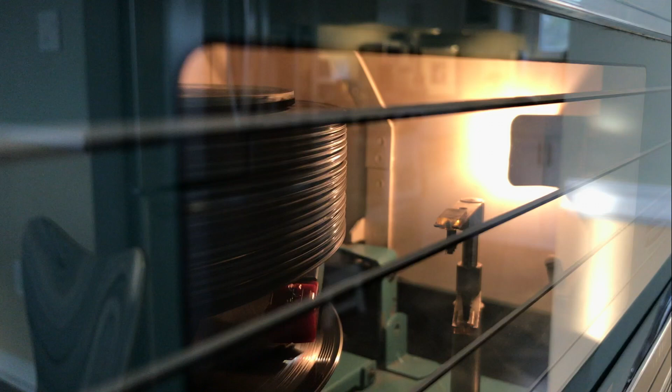In this video, I'm going to tell you how to repair your broken Seeburg 1000 motor coupling. If you've got a Seeburg 1000, you know what I'm talking about. This is the Achilles heel of this machine. I'll show you where it is.

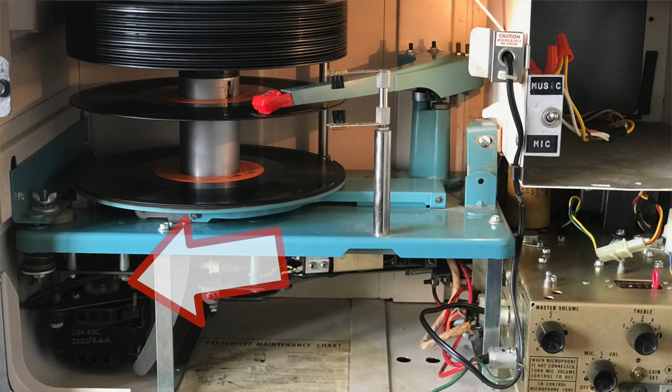This is actually the motor assembly, and this is the way you'll see it if you look inside your machine. And this is the piece. It's a little rubber thing that goes between the capstan up top and the motor at the bottom. They made these out of a kind of rubber that would perish over time. And so here's one. Actually, this whole thing I made fresh a couple years ago in the machine shop.

We're not doing that today. What I'm going to do is show you how to fix your existing one. But this is what it's supposed to look like. A capstan will be vertical like that with a flexible rubber coupling that goes like so, and then a small ring that goes on the end of the motor. Now here's the motor. This would connect like that.

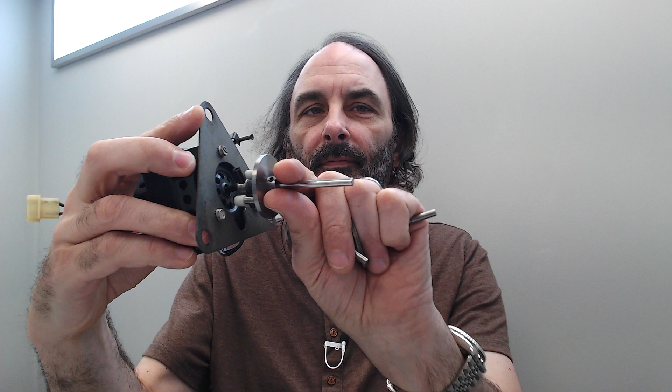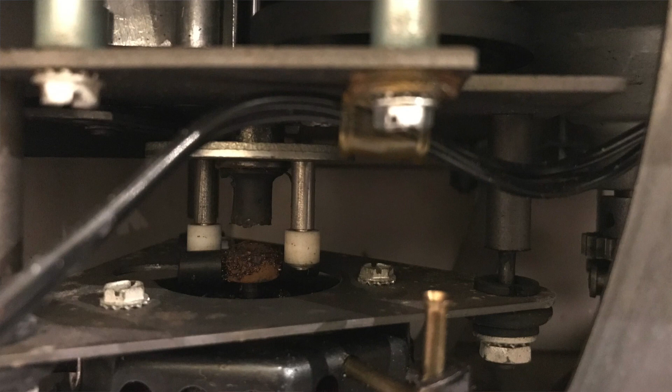And this is what most people's look like. They're broken. And here's an image of one in a machine that's broken. That's what you'll see. And if somebody's selling one on eBay, you might want to ask them to see a picture of the capstan so you can see if it's broken or not.

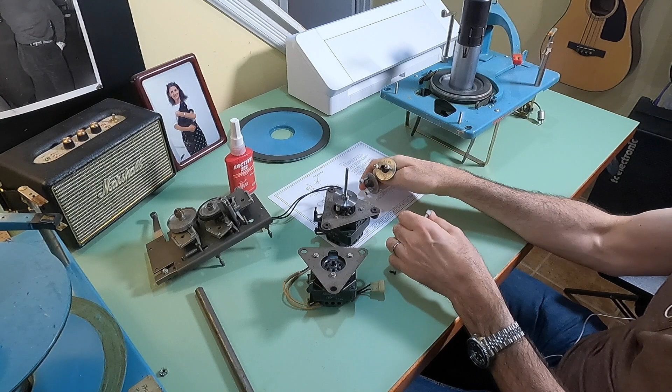Let's get to it. And you might not notice that you've got a broken coupling because of the way they designed this. If you look at it, you can see that there's these two little plastic outrigger things that sit in alignment with these little wings on the hub at the top of the motor. And so if this coupling breaks, these little wings smack against these two little outriggers, and those will turn your capstan. Let me show you how this looks.

So if you look in the front of your machine and you see that this rubber is broken, then you have to fix that. This is just going to make a clattering noise, and your playback is going to be all full of wobbly stuff until you fix this. So the way we're going to go about this is we're going to take off the broken old stump of rubber, and we're going to drill a little bit of a hole in here.

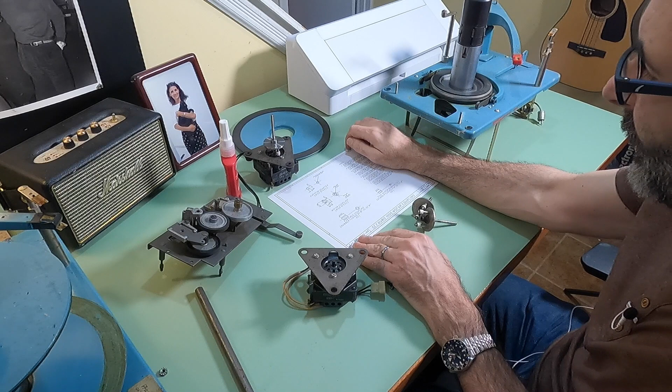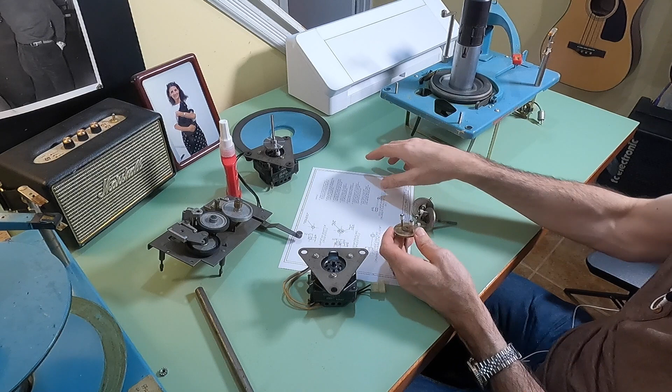We're going to make some pieces in the machine shop, and we're drawing here. We're going to make a small ring that's going to go in the base here. Going to hold it on with this screw. Then we're going to make the coupling that goes on the motor. That's this little thing with the wings on it down here. We're just going to make that out of this piece of steel.

And finally, we're going to glue in a piece of rubber tubing to form this coupling here, this flexible coupling. And by the time we're done, we'll have a new coupling for your motor.

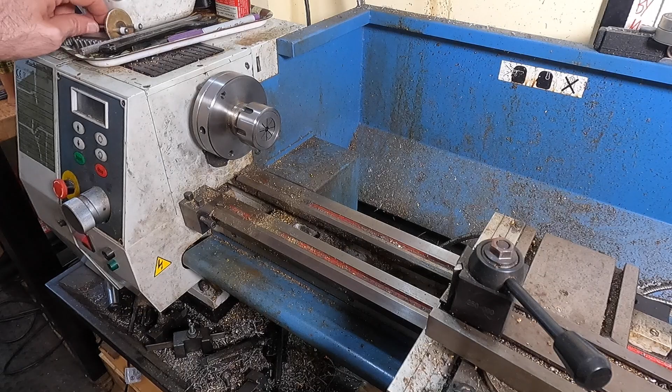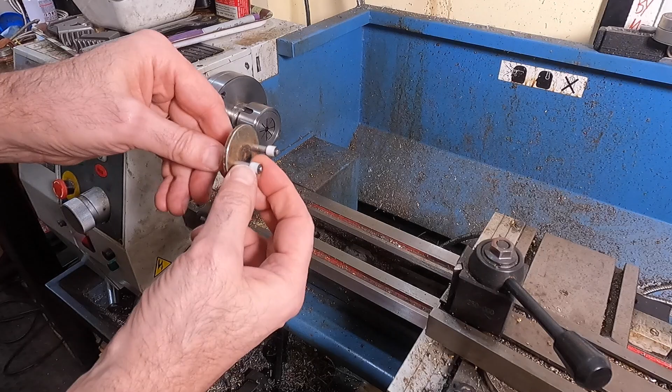So the first thing the drawing calls for is to make a small 1/4 inch cut inside this, right in the bottom of that. It's going to be a little bit tricky because I don't have a cutter that's going to easily clear these little wings, but we can't take them off because they're sort of stamped in position here. So let me get a collet.

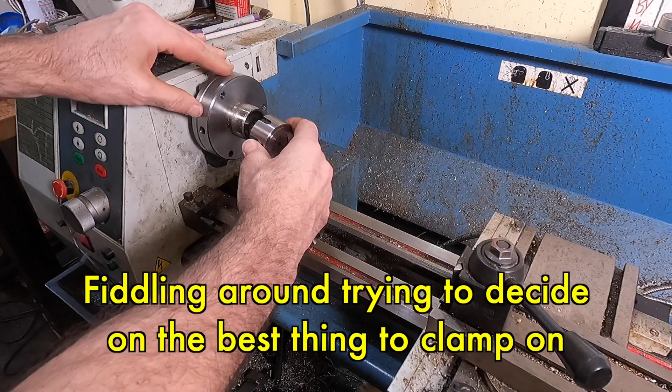Oops. Yeah, this will fit much better. Pop that out. Pop the new one in. See how that works. Wasn't planning on doing all this, but it seems like it might be necessary.

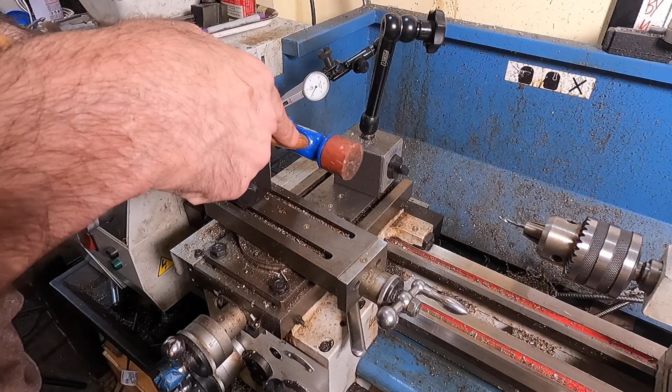All right, let's just see if we can get this thing to be kind of... So that's low, that's high. We shall... All right, that's good. Hopefully that'll help.

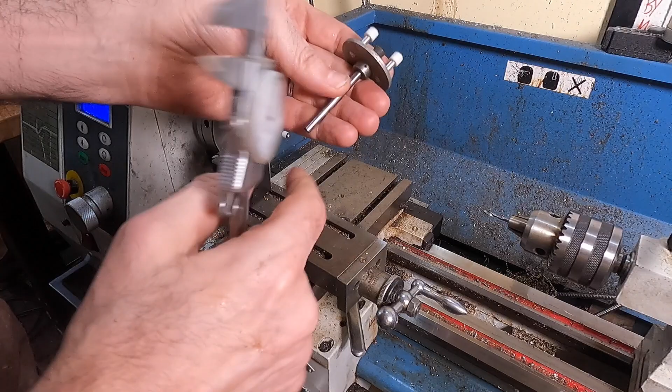And see just how deep the screw would be on one of these things. Got this pin, and we don't want to go into the pin. That's hardened steel. We don't want to do that. So it looks like, I'm just eyeballing it here, we've got 1/4 of an inch. That's all we got. 6-32 will be a number 36 drill bit.

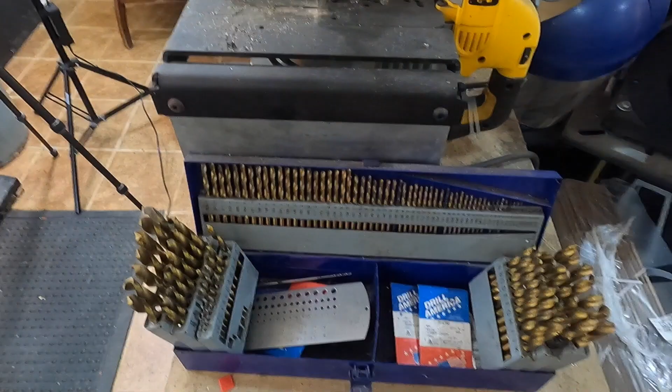A little piece of paper behind here, and I'm going to sight on that drill bit. Make sure the tip of it, because we don't want to go into the roll pin. So there we are, we're right at the edge. Zero this out so that as I crank in, I'm going to make sure I don't go past 250. And we'll just go maybe

Makes me wonder if that capstan's hardened or not. I guess not. Okay, we're at 200 thousandths. That's scary. There's little wings going over that. I'm not used to that. It's a little sketchy. Just try to brush a little coolant on there. It's going to cause a problem. So we're at 200 thousandths. I'm waiting any second to actually hear that roll pin.

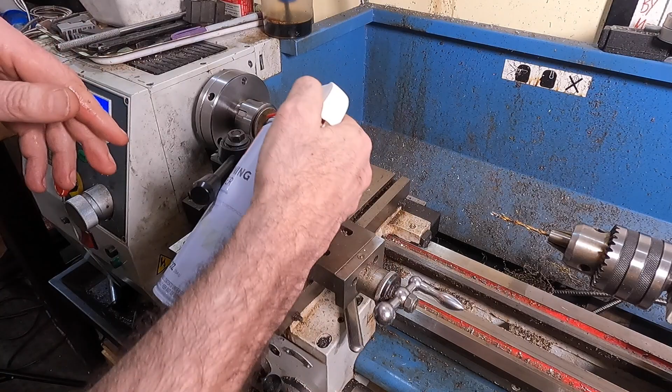240. That's good enough. Okay. I'm actually just going to use a drill bit, 1/4 inch drill bit. And that's a 1/4 inch. All we really need is for the little sleeve we're going to make to go in there and locate itself on the edge. So that'll work. If I had a boring bar that would fit in there... I don't have a little tiny boring bar like that.

I gotta put the oil on ahead of time because of these dumb wings. So I need to go 0.0625. There it is. Pick it out. And again, all that's there for is just to locate the thing that we're going to slip in there so that we can latch it down firmly with the screw.

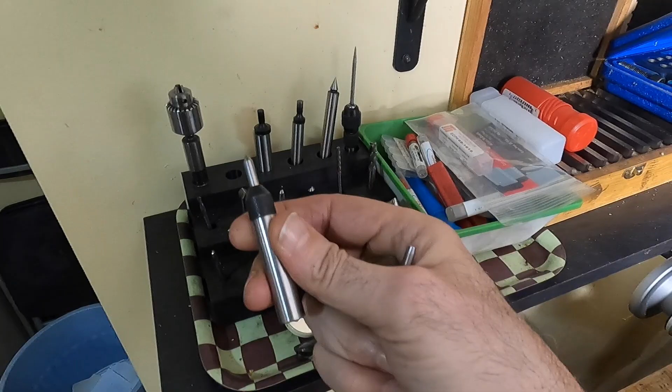Now, that looks like the one, 632, and grab this little thing here. It's going to go into the end of the tap wrench and guide it for us. A little springy thing that goes into the end of the tap wrench like that, and it'll keep me from going astray. Okay, I'm going to start with the taper tap right there.

We're not going to get many threads in this. Tap Magic. Can't even get the taper tap to start because we didn't go that deep. It's going to be a bottoming tap all the way. We hit bottom right there. There's only like 5 threads in this thing. That's all we need.

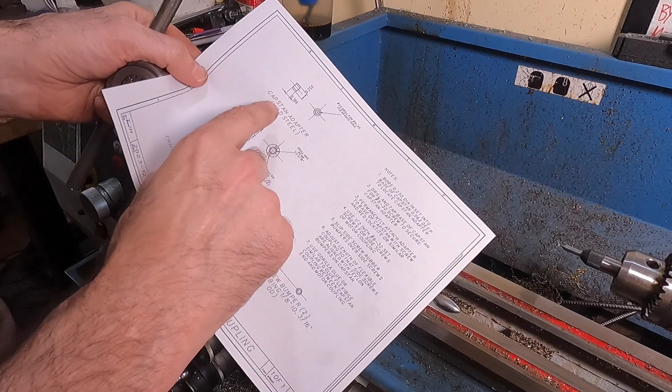Let's see if our screw will start. There it is. That's nice. That'll hold our little adapter sleeve very well. All right, now we're going to make this piece right here, capstan adapter. It's going to be 1/4 of an inch wide, and this is 3/16 of an inch long, and there's going to be a hole drilled through it for the screw to go through.

So I'm just going to use this piece of steel. It's mild steel, and it fits right in the 1/2 inch collet that we were using before. Leave that sticking out a little bit like that. Right. So everything's good.

Now this is going to be 3/16 long, so I'll just go in. I've taken my facing cut. I have not moved the position of the carriage. I'm going to go up here and zero everything out. Okay, I'm just going to go in. Just going to touch off. And I'm just going to go in until the number says, let's go.

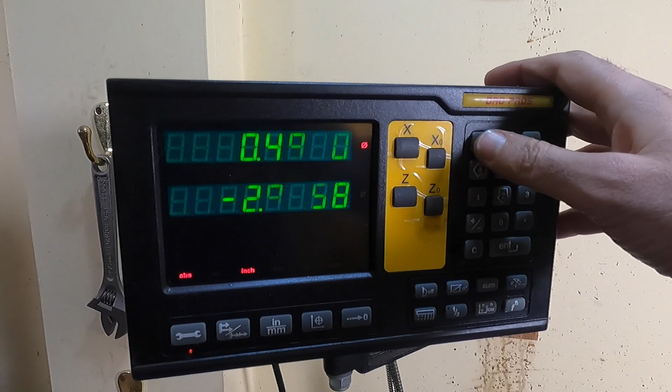We'll go in a 1/2 inch, maybe not a half inch, it's a little bit much. 3/8. There we go. I have not touched the cross slide. And go in here and measure what this says. It's telling me 494 thousandths. So we go X. Enter. So now what that says is that the little circle with a slash means diameter. So that means 494 thousandths is the diameter of the part.

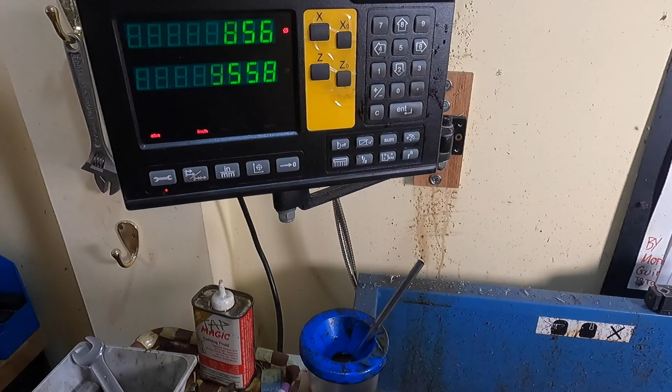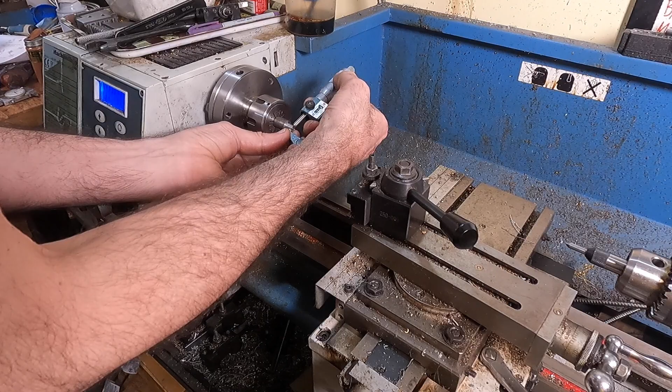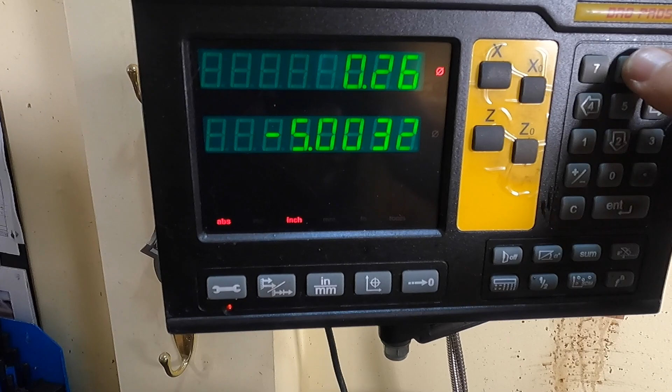So as I move the carriage in and out, we should see that changing. There we go. All right. That's claiming to be 260. It's probably not. This lathe is not perfect, but 268. Not bad. Now that we know it's really 268, we're going to 1/4 inch. So we need to take it to 250. That should be 250.

Always deburr your parts. Now I'm going to drill the hole in the center. Then I'm going to use a parting tool to chop it off. And we're going to be drilling by the print. The hole is a number 25 drill. So we're going to use a spotting drill and then the number 25. Number 25 right there.

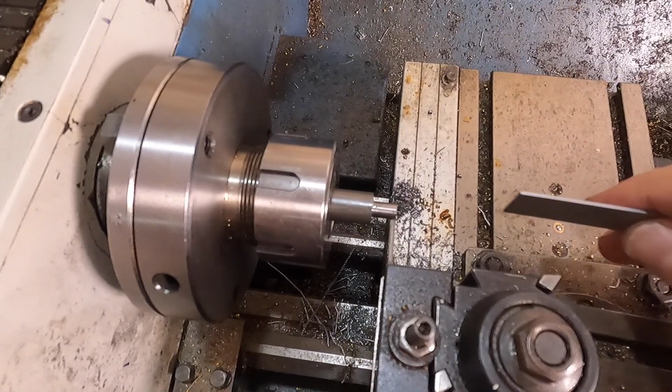So you see that this parting tool is right up even with the end. We just take the scale, run it up against it. You can tell that it actually is right on there. So what I want to do now, I zeroed out the display, and I want to move over until the display says 3/16 of an inch, which, well, on the drawing, it says 188 thousandths.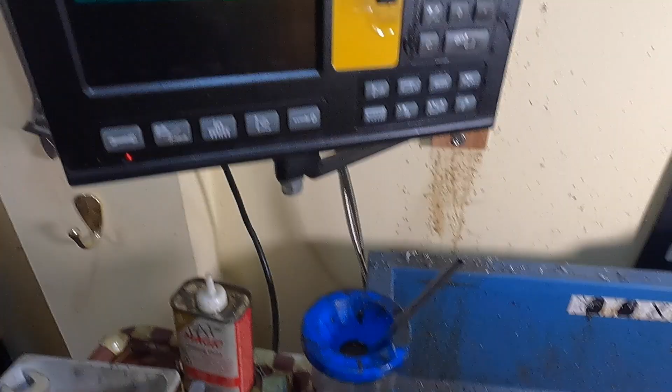So go here, and move over. 188, oh, that's enough, that's fine. And so you can see now that we've actually moved over. Let me get the scale the right way. Just a sanity check. You see we're 3/16 over. A little oil on that.

We're going to slow way down. And then I'm just going to use this to catch the part. And there it is. The part is complete. Let me see if it's right in there. We get the screw and hold it in place. I think the screw is just a touch too long.

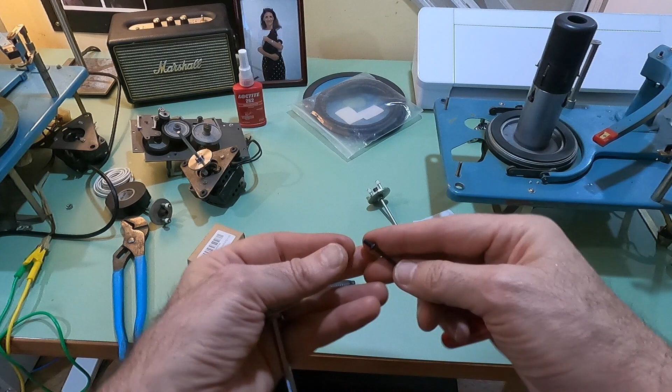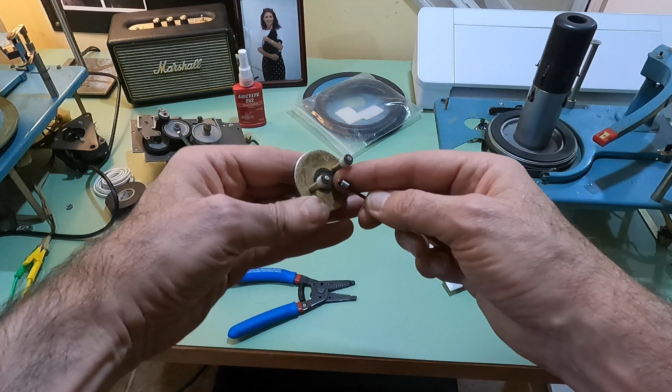Oh, son of a gun. We're almost there now. We just need to make the other end. So I went over to the bandsaw and cut off the end of the screw and ground it a little bit on a belt sander. And so there we go. Got this little stump in the middle of the capstan, and we're going to use that to glue up our flexible coupling when the time comes.

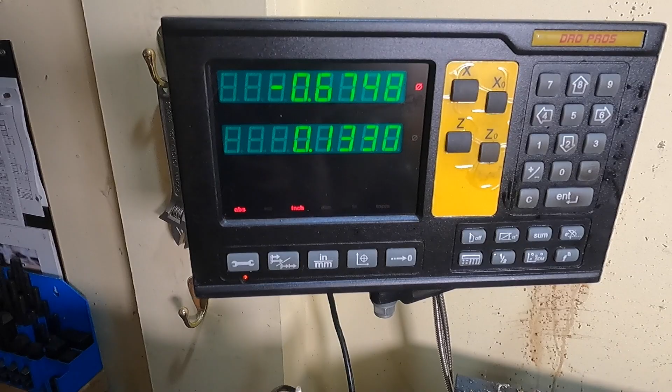So it turns out we did ourselves good with what we did on the lathe earlier. This little bump that we left on there is exactly 250 thousandths wide, and then the length turns out to be, if I go and we see that it hits at 133 thousandths, meaning we've got 1/8 of an inch. That's exactly what we need there. And we're just going to go, there we go. We've done the end just fine.

Now the outside, we need to get that. We look at the print and we see we're going to be 438 thousandths. The diameter of this part right now is 500. This is a 1/2 inch stock. So if I go over here somewhere and I go touch off, there we go. And we'll just take a cut that way.

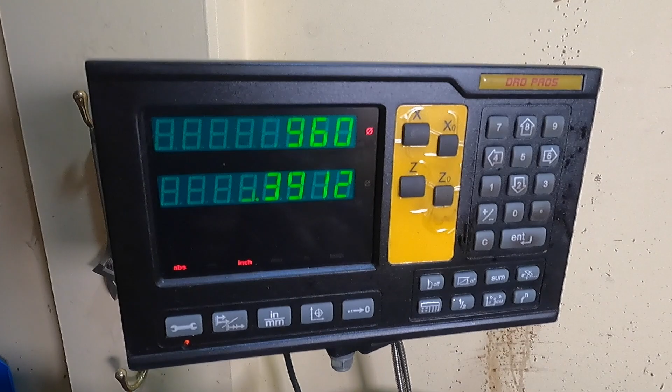And I'm going to keep this going for 1/2 inch from the end. There we go. We're 496. So go up here, I've typed in, I put in my X, 496, and we're just going to dial it till we get 438.

Drill and ream to 3/16 of an inch. You go the 64th under, so grab 11/64, and there's the 3/16 inch reamer. So I'm going to go in with this 11/64 inch drill bit. This will just guide itself in the existing hole very nicely.

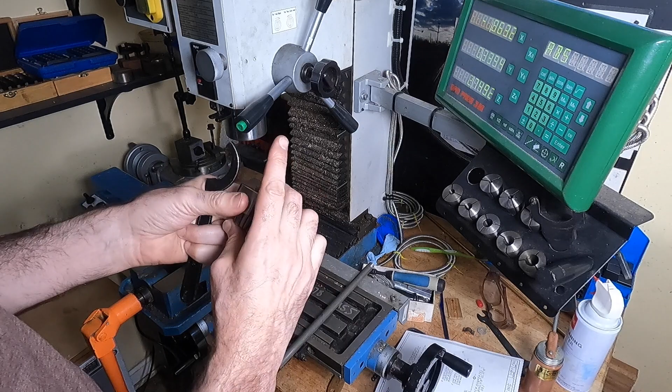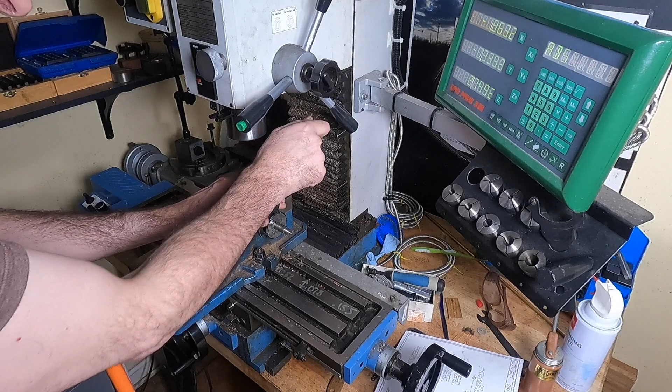Should be ready. Now we need to drill the holes through this, so I'm going to do that on the milling machine, and then when we come back we're going to part it off. So this is the collet that we used on the lathe. We're going to use the very same collet and a collet block to hold the work. So I'll pop this into the collet block. Just going to put that in the vise, cinch it down, tighten it.

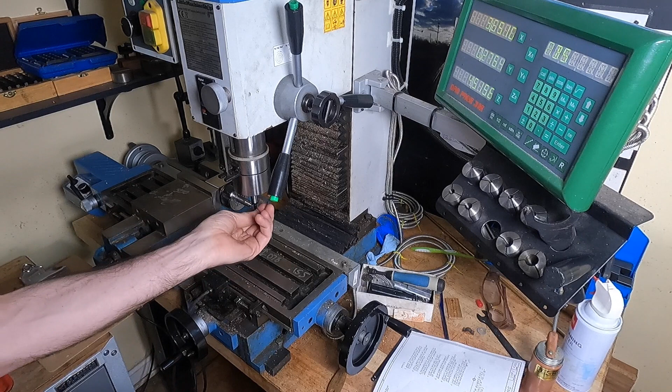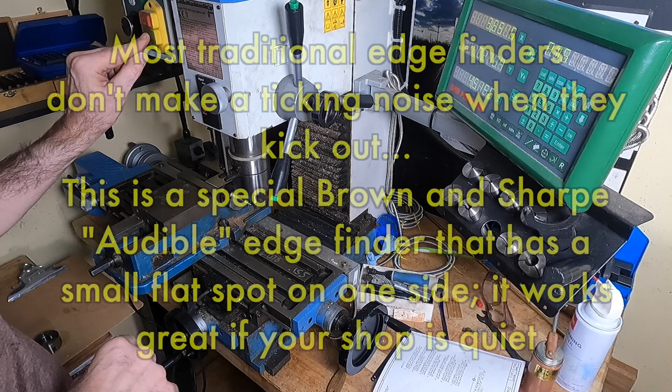We need to locate the end of the part. We also need to locate the sides. For that, I'm going to use an edge finder. Okay. Okay, so what's going to happen, we're going to start this up, and when this is spinning, this end can move around and it'll find its own center, and as soon as you hit the point where the edge finder is right up against the edge, then it's going to pop to the side and it'll make a little ticking noise. So we just start that up.

Going, keep going. Right there. I zero out the display, and we'll try it again just to make sure. Dead on, 0. So now we know where the end of this part is. We need to know side by side. So I'm going to do the same thing on the side.

Come in. Sneak up on it. Right there. 0. Now we do another little trick here. We go to the other side. We come in.

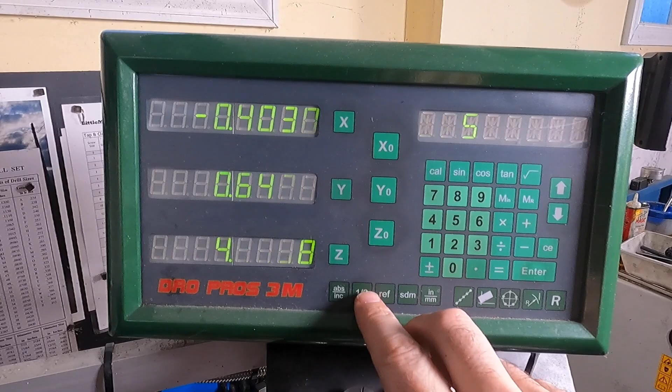This was zeroed out, then we moved it. Now it says 0.6422. I'm going to hit half Y. So now we're zeroed out on the center. We've centered. We know where the exact center of this part is. That's where we're going to drill our holes.

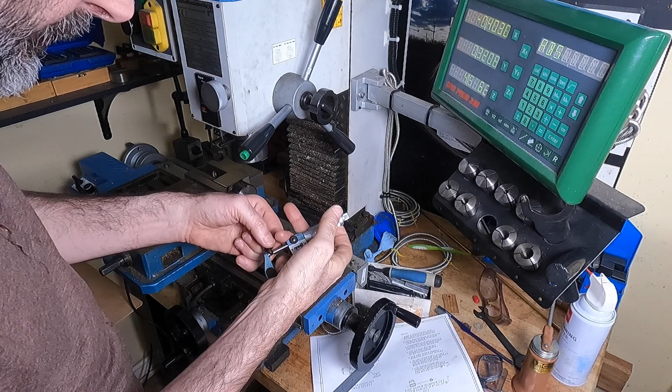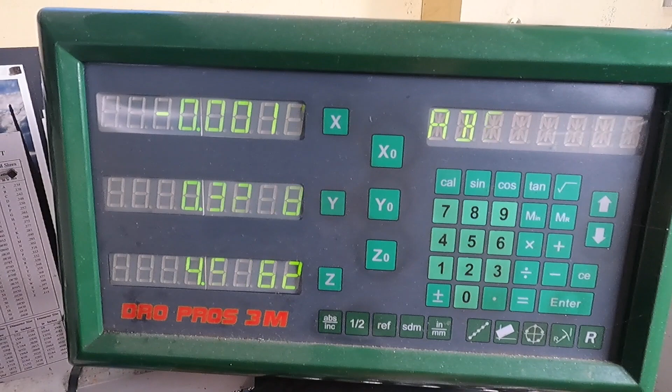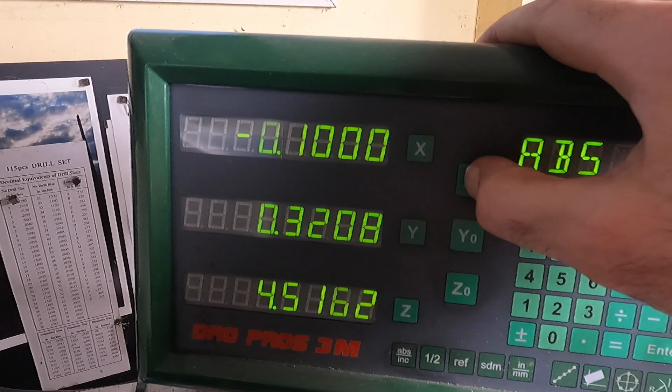So we know what this is because these things have a fixed size. But this edge finder is actually 200 thousandths wide, so we need to take half of that off. So we dial in on the X. We dial it until it's at 0. Now we dial up .100 and we zero it. Now the center of the drill bit will be right on the edge. The center is right on the edge.

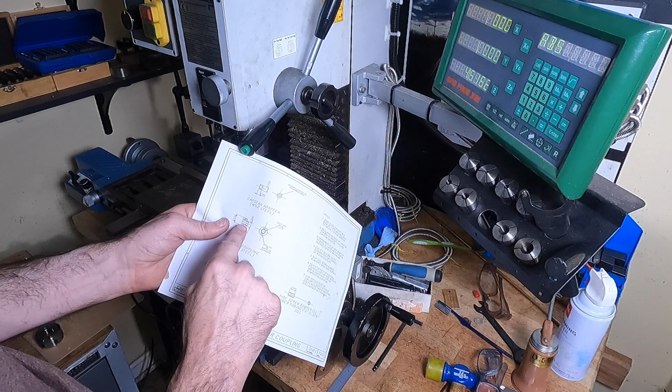Now we can move over by the amount that the drawing says. That hole doesn't have a dimension on it, so that is going to be right in the center line here. So we need to move over 1/8 plus another 1/8. This whole thing is 3/8, so we're going to move over 1/4 inch, 250 on the x-axis. 250.

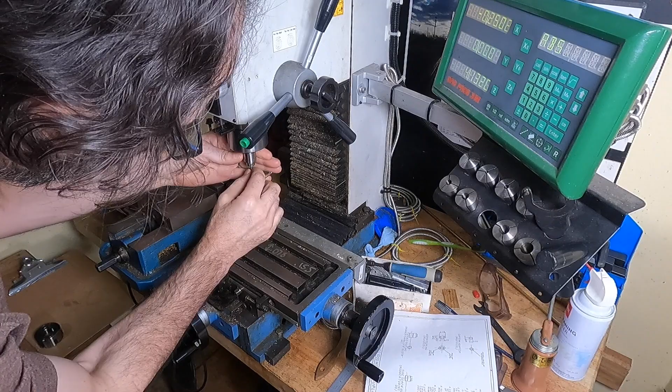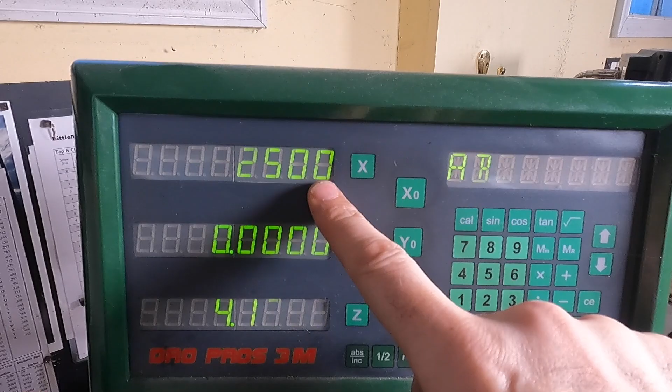I have a small drill chuck that works great for these little things. Let me tighten it down. Spotting drill. Theoretically, because we see 0 on the Y, we're in the center line. And 250 on the X, we're 1/4 inch from the edge where we measured from. That's theory. Let's see what happens. And that looks like we've done it.

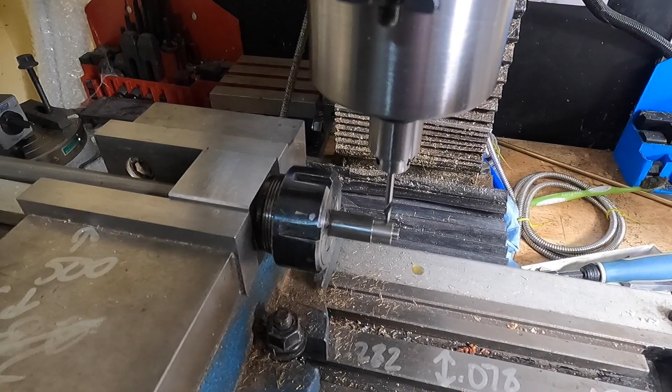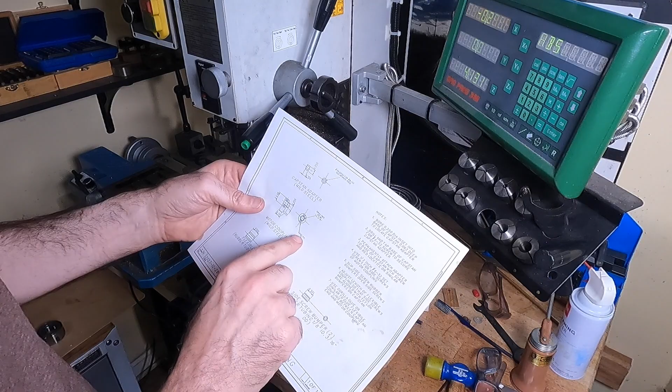Spot. And drill. We need to drill for 6-32. We're going to use a number 36 drill bit. And I'll feel it break through. There it is. Now we've got a nice thing.

I put this block right up against the edge of the vise, so I can flip the block over and do the other hole. Just put the block at the same place, locate it up against the edge of the vise, and spot and drill. We're not moving a thing. The remainder of the work is the same routine we did before.

This little thing in to stabilize our tap. This time, I think I can use the taper tap first. In fact, I'm just going to run it all the way through. I think I should be able to. So we've got that. Let's see. A little bit of tap magic. There we go.

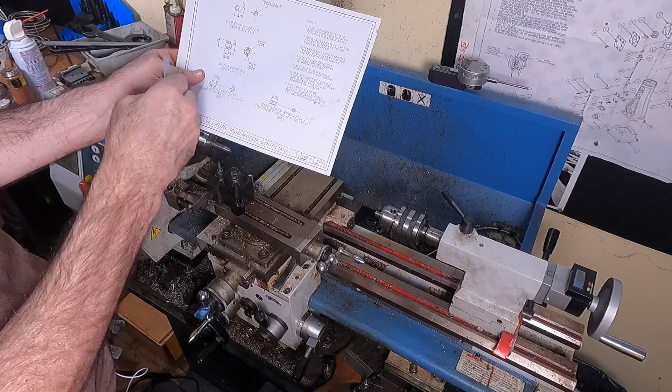Total length of the part is 375. So I'm going to put the edge of the parting tool right up on the end here. There we go. Zero that out. Move over 375. And that's where we're going to plunge.

And that's it. All of our machining is done. Let's get a little brake cleaner, clean off our parts.

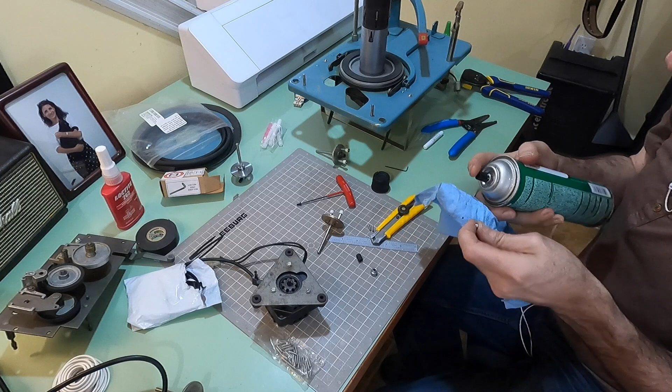This part is going to be screwed onto the capstan. Let's put just a little bit of Loctite on there, just a drop. And put it on. There, that's on there good.

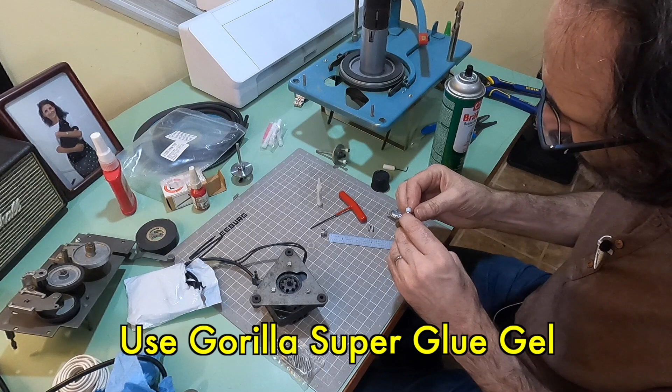Now I've cut a little piece of this tubing, and I cut a piece to length so that the holes are going to be in the middle of these white bumpers. I would recommend using Gorilla Super Glue Gel. I don't use regular super glue, but my Gorilla Glue is gooey, so I need to order some more. But for demonstration purposes, regular super glue will do the job.

Now I'm going to put these little screws, again, they go in the side, and this is going to fit right there. That's what it's going to look like. So I'm going to put a little bit of super glue on this. And get it so those are perfectly centered. That's it. I'm good to go.

Now I'm going to cut a couple pieces of this tubing, and these are going to cover the wings. So we need about that much, not that much. And these slip right over the screws. And now we have two.

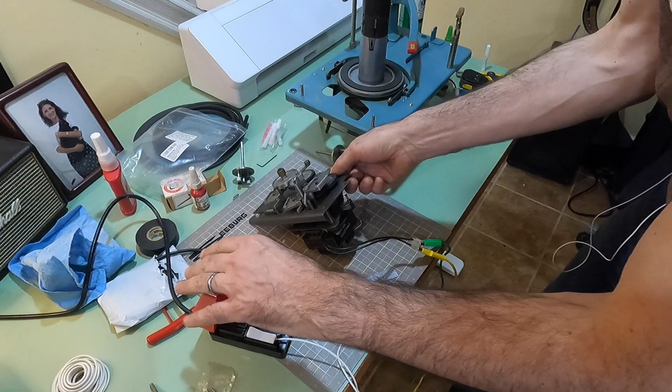All right, we've got a mildly sketchy setup here. Those aren't touching. This is good. We should see this motor come to life. And there you go. See the wheels are turning, and motor's turning.

So there you have it. Yes, it's possible to fix the broken motor coupling on a Seeburg 1000. It takes a little bit of machining and a little bit of glue, and you can do it. I don't know if anybody's going to actually do this, but if I've saved one or two Seeburg 1000 machines out there, I've done my job.